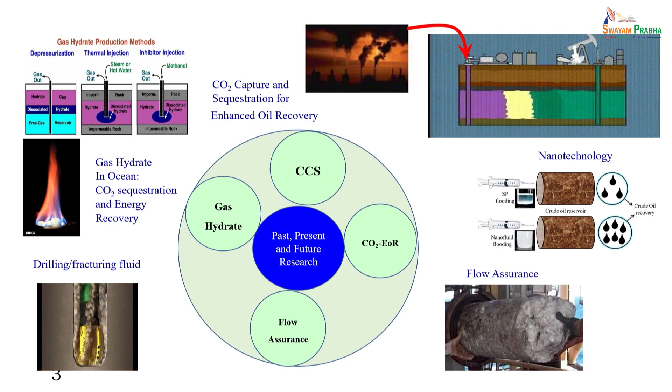Today's talk will primarily focus on properties of carbon dioxide, and mainly on the capture side, CO2 capture and transportation. As I said, there will be talks given by various other faculties which will cover utilization, catalysis partly, maybe conversion, maybe electrochemistry, etc. So we will have to figure it out, you have to connect the dots, right?

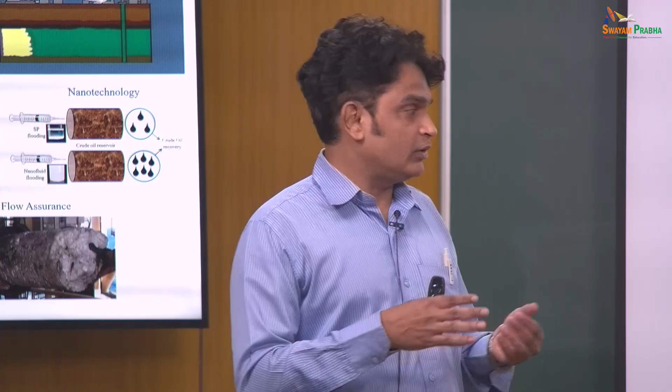She has already discussed these climate issues and how the temperature is increasing. We have been closely around 420 ppm or so, and we have been releasing about 36 gigatons of carbon dioxide into the atmosphere every year, and it is increasing day by day, right?

Why is it important? Even if you talk about 420 ppm, the question is whether it really matters as a worry. It's like out of 1 million balls, we have 420 balls. So do I really worry about it?

It is indeed important. There have been lab scale experiments showing that a small amount of CO2 can be responsible for increasing the temperature. If you make sure all the conditions mimic the atmosphere, then the temperature will rise. For example, if I sit in a car, close the door, and come back after a while, you can feel the car is hot, you cannot stay inside, right? This is a greenhouse gas effect, so we have to really worry about it.

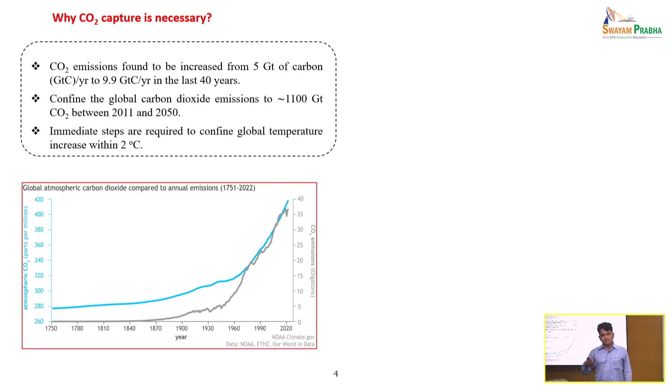If you look at the data over the past several years, there is a rise in temperature. It is of course because of CO2, and there are various other factors as well, but one major factor is carbon dioxide emission, right?

Now how can we go for net zero? Of course renewables is something we have to consider. But can we really go for renewables entirely? Can we take care of all our energy requirements from wind, solar, and so on? No, it's not possible, because today about 82% of our energy mix comes from fossil fuels all over the world. Looking at growing economies like India and China, we are primarily dependent upon fossil fuel, including coal, oil, and gas.

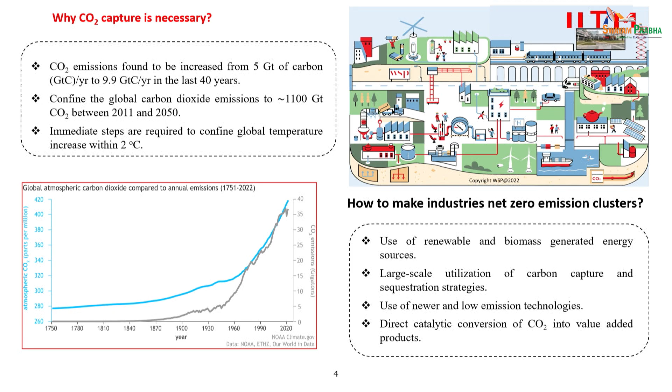If you go out of the campus, you will find several thousands of cars and automobiles running, including two-wheelers, and you will find that they all use oil, petrol. If there is a bandh or strike by petrol pumps, I think there will be a mess in the city, right? All prices will go up. So energy is very important for our living. If you do not get oil, there will be an energy crisis, and if there is an energy crisis, there will be a food crisis. So all this is connected, right?

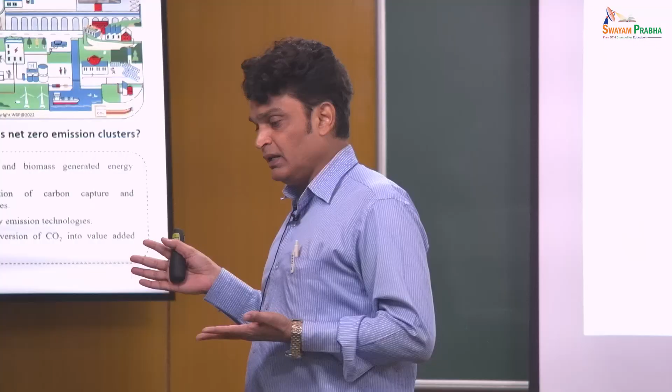Nowadays it's not that we only get locally made food available; we cannot survive on one thing. So energy is very important for our living, and our energy requirement is increasing day by day. I joined in 2010 at the IIT Madras campus, and I saw there were very few cars, even as an assistant professor when I joined, I did not have a car. I got one in 2021 or 2022.

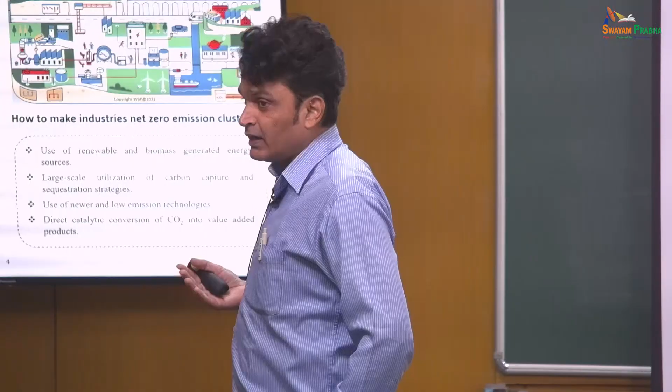I was happy riding my cycle. I live on campus, so why would I need a car? My children studied in Kendriya Vidyalaya and went on two-wheelers, so to be honest I did not have a car, not because I couldn't afford it. But today any assistant professor who joins the campus comes with not one but two cars, because both husband and wife are working. You can see the difference, right?

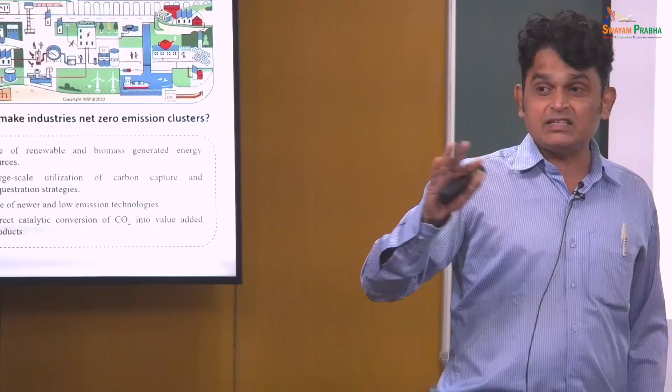All the classrooms are becoming air conditioned. That energy is not coming from somewhere magical, it's coming from electricity, and electricity ultimately comes from fossil fuel. So we have to understand our energy requirement is increasing. Everyone has a dishwasher and all kinds of electric equipment, and that requires energy. So energy is very important.

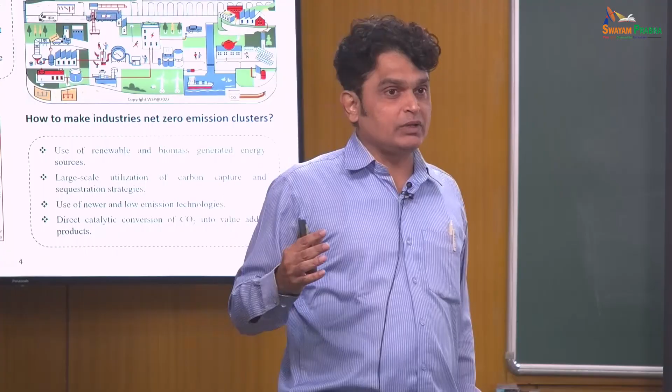In a short time, at least 3 to 4 decades, I do not see us going away from fossil fuels. It's not going to happen by magic that suddenly after 2 years we'll have everything coming from renewable energies. There have been studies which show that even for 50 to 60 years, fossil fuel will dominate the energy basket. The international energy agencies say that. Anyway, I am not going into detail about that.

So what is pollution, man-made pollution? We have solid land pollution, everybody is aware of this. We have liquid water that pollutes our rivers and everything, and we have air pollution. These are the 3 major forms of pollution.

Now what is the difference between them? If I go back, I can easily segregate solid material from the land. I have plastics, I can segregate that easily, even hand pick it. It's easy to separate from the land. Go to water, the liquid phase, molecules are different. It's slightly more challenging to separate dyes from the water. So I need a membrane, reverse osmosis, and all kinds of chemical processes that require additional energy.

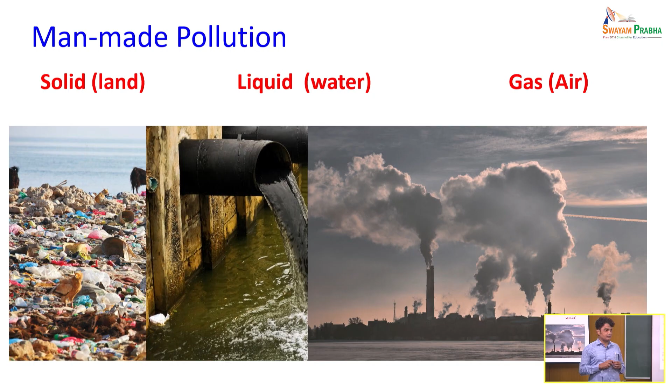Go to air pollution, very difficult. Once it is in the air, I cannot say that a CO2 molecule going from your nose can be captured and put in the dustbin. A molecule that goes into the air is difficult to capture. So either you segregate before you make the pollution, or you segregate after, which is easy for other things but not for air. You have to segregate it before you release it into the atmosphere. That is the more challenging aspect of air pollution.

Of course, air pollution involves particulate matter and other stuff that I am not going into detail about. But as far as CO2 is concerned, we have to ensure technologies are developed so that before it goes into the atmosphere, we capture it and dump it somewhere.

Now this CO2 emission is increasing, and as I said, the majority of energy consumption is responsible, like transportation, energy used in buildings, other industries, etc. And of course there's agriculture, forestry, and land use. So energy is a major section that results in CO2 pollution, carbon dioxide.

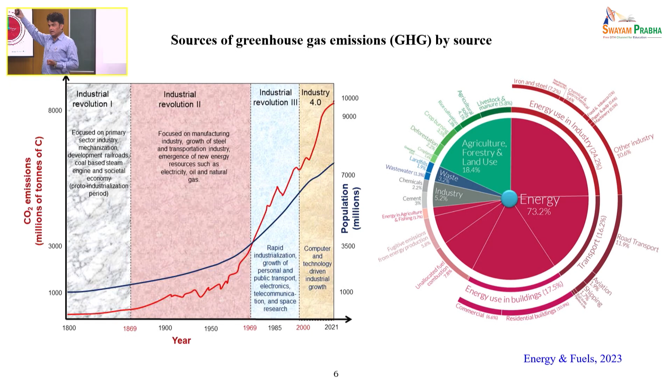Take any flyover you see, they are building flyovers everywhere. Ultimately that results in pollution, because you have to generate cement, steel, and everything. You have cranes running there. To generate cement you require a lot of energy and you release CO2. Even generating the steel required there contributes.

So every man-made activity ultimately has a CO2 footprint. Even the chair that you are sitting in is not net CO2-free, it has generated a certain amount of CO2 into the atmosphere.

So why am I telling you this? We are talking about today's $3 trillion economy. The Prime Minister says we have to go to $10 trillion, or $5 trillion, and so on. Every country wants that. Can that happen while saying I am not going to emit CO2 and still have a $10 trillion economy? It's not possible. There has been a correlation of CO2 emission with economics rather than population. The more you want your economy to grow higher, the more you become a consumer, you consume and throw. So sustainability is an important aspect of this whole game.

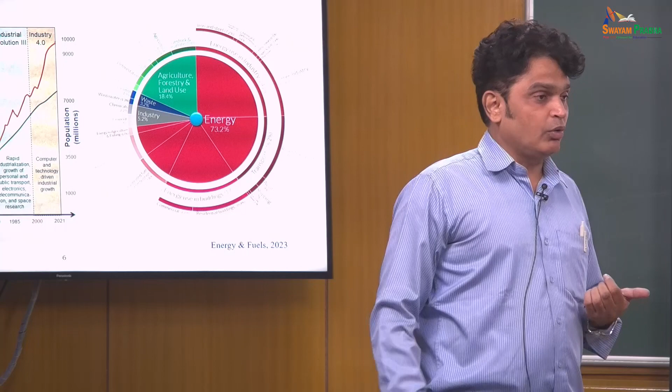Anyway, going forward, the global temperature is rising. I think Madam had already covered that.

Land to ocean temperature anomaly, somewhere around the 1970s, 80s, it is over. Beyond that, it is increasing.

Now there are various scenarios that show, if you capture carbon dioxide versus if you do not capture carbon dioxide, how the annual mean global temperature will rise in the next few years. There are certain models, Madam will cover those in detail, so I am not going to spend more time on that. But you have to understand that we have to predict the future 20, 30, 40 years down the line in energy, environment and earth.

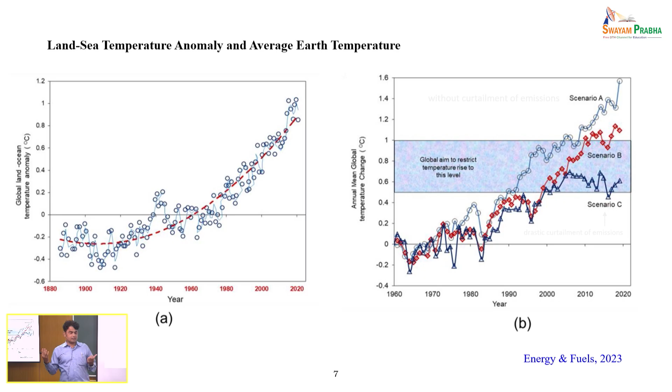So if you look at the name of my lab at IIT Madras, I have written 3E lab. It talks about earth, energy and environment. It is a nexus. I cannot say that I do not want energy but I want less CO2. The more energy you want, the more CO2 you are going to release into the atmosphere. So you have to dump that into the earth, or you have to take care of your environment. All these 3 E's are important when you look at overall climate change, and this nexus has to be understood.

Anyway, this is an example of coal. In the 1970s, 50s, 40s, you might have seen steam based transportation through trains. The British used to have trains. Then, because of pollution, they stopped that. They said, I am not going to run the train because it generates a lot of pollution, I should run it on electricity. Now most of the trains are actually running on electricity.

This data shows that somewhere from 1950 onwards, the use of coal in transportation has decreased. It's almost negligible now, in the 1990s and beyond. I do not see coal. Earlier, when I was a child, I could go into the market and buy coal. Coal was even used in households for cooking purposes, and kerosene was used in households too. But today if I go into the market, I will not get coal easily. I have to find out, somebody will say go here and there. Getting coal is not easy right now in the general market.

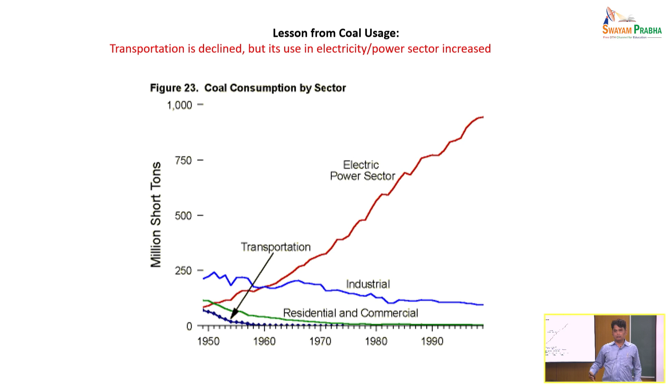But look at coal use in electricity generation, it has increased. So when we cannot see something, does it mean we are going away from coal? No. Today also, as Madam said, Germany wants to restart their coal fired power plants. I was reading a couple of weeks back that New Zealand also wants to import fossil fuels. So they have realized it's not a quick decision to say I am not going to use fossil fuels.

So even electric vehicles - I am a little critical about electric vehicles, not because they are not clean, of course they are clean, but they look clean. If you go back and look at the calculations, you will find they are more difficult for the environment, because they are not going to improve the electricity requirement. Where will the electricity come from? If we really want to generate all electricity from solar energy, then that's fine, but I am not seeing that happen anytime soon. Even to generate silicon solar cells, there are calculations in the literature which show that they also generate CO2. So nothing is CO2 free, net neutral.

Less than 1% of vehicles on the road are electric vehicles. There are about 15 million or so electric vehicles, less than 1% right now. But given the fact that I am happy with electric vehicles, does it mean that I am going away from fossil fuel? I require more energy, going forward. So CO2 in the atmosphere.

Nature has its own way to address the CO2 concern. It has said, okay, whatever CO2 is being emitted, I will capture that. So almost 50% of CO2, it has been said that nature takes care of it on its own, it absorbs it. But because we are growing our economy and burning more fossil fuels, the net CO2 going into the atmosphere is increasing gradually each year, and it is getting accumulated.

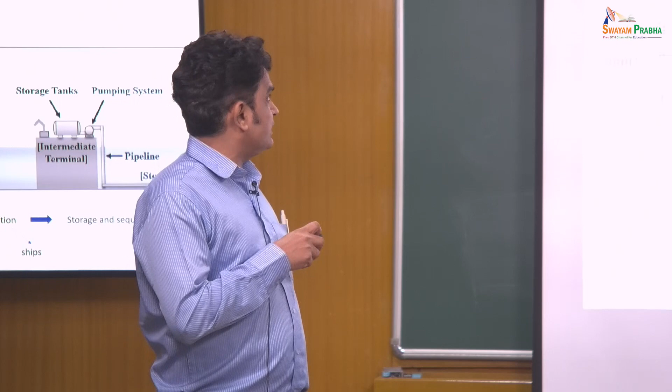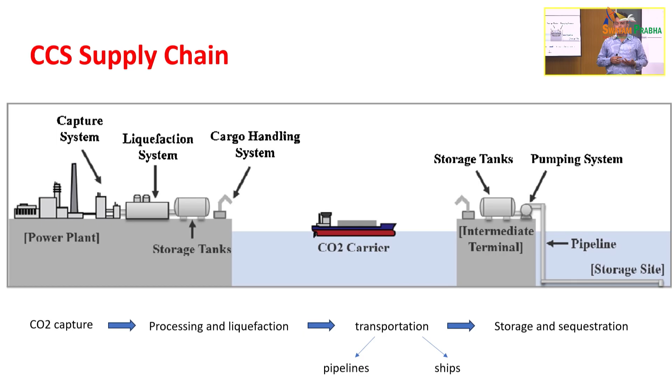Utilization means converting CO2 into value-added products like methanol, ethanol, or dimethyl ether. What kind of product can you convert CO2 into? Urea, carbonates, methanol—right? Most of these conversion processes still require energy. The raw material needed, for example for methanol, requires some kind of hydrogen molecule.

Where will the hydrogen come from? Today 99% of our hydrogen comes from fossil fuel, and less than 1% comes from the so-called green way—this is per the International Energy Agency report from 2021. So conversion and utilization are still a long way to go, unless I could get hydrogen from biomass or from splitting water through solar energy, which is again very tricky. There are technologies available, but these cannot yet be looked at for large scale—I cannot generate all hydrogen from solar power plants by splitting water. I can do that in the lab, but it's still a long way to go.

So what is a quick way to act? I am not criticizing any technology here, I am saying I do not have time, I want a quick decision. The quick decision is that I have to dump it somewhere—dump it in the sea or onshore. It's at least more favorable in the ocean or onshore, scientifically proven. Anyway, we will discuss that.

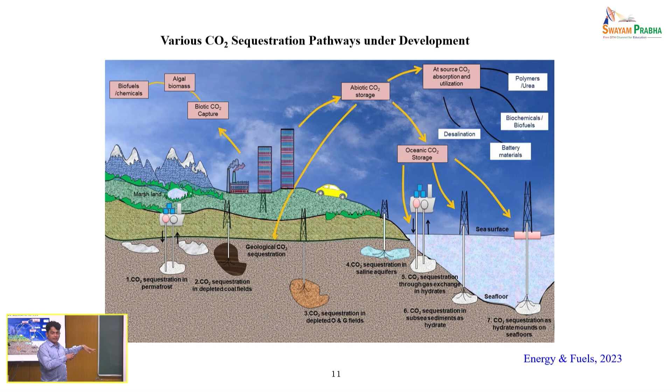The other potential region is the sea floor, where you can sequester CO2 in the form of solid hydrates or below the seabed—I will discuss that in one of the next classes, not the focus of today's discussion. Madam will partly cover aquifers, EOR, etc. We have worked on that, but Madam will be best to discuss all these details.

Anyway, this is ocean storage. In the ocean you can sequester in different aspects. You can do a CO2 plume sinking, disposal of CO2 in the form of carbonates since CO2 can convert into carbonates, and you can actually have CO2 liquid pools in offshore conditions, where CO2 will form liquid conditions.

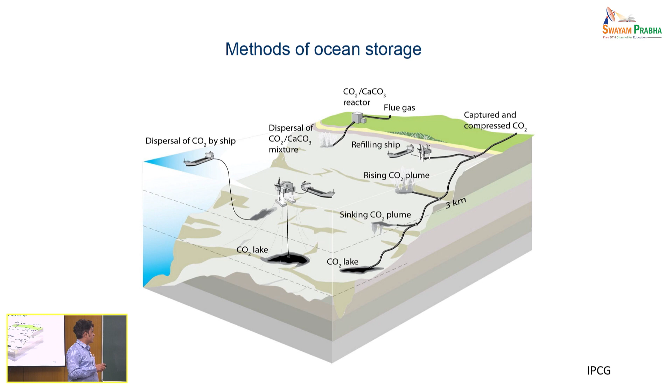I will discuss that in detail in the next class—how CO2 can form a liquid in the ocean and why it is safe. Anyway, this is the general CO2 storage mechanism: you have a flue gas, CO2 separated in a reactor, captured carbon dioxide compressed, and then transported through pipeline or ships or risers, etc.

Now there are various technologies available right now, from CO2 capture to sequestration. This is the TRL, technology readiness level, which starts from concept to commercialization. Most technologies are at TRL 9: post-combustion capture of CO2 from power plants, pre-combustion capture specifically from natural gas processing, transportation on onshore and offshore pipelines. CO2 is being transported—even though in India we are not doing it, but in certain countries like Norway and the US there are pipelines onshore and offshore transporting carbon dioxide. Then transportation by ships, CO2 sequestration in saline formations, and CO2 injection in depleted oil and gas fields or for enhanced oil recovery—these are all TRL 9.

There are certain technologies like ocean storage that have moved to proof of concept and now also to pilot scale, so it is now at TRL 6. Norway is doing that—this is somewhere in TRL 6. This is an old slide, 2018 data that I have taken.

Oxy-fuel combustion, pre-combustion low temperature separation, biomass-based carbon capture power plants—this is based on ionic liquids, and this is membrane-based CO2 separation. You can see there are a variety of different technologies beyond TRL 6, from pilot plant to commercial, and new technologies are also being looked at. For example, one of my students, Prerna, is working on metal organic frameworks for carbon dioxide capture—she will discuss that briefly in a separate discussion.

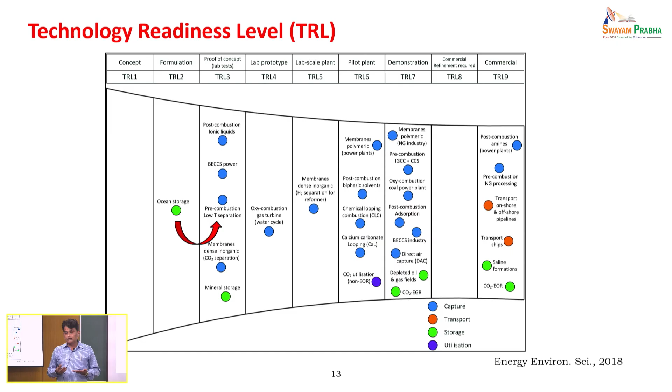Why this major focus on CO2 capture? Because anything you want to sequester from air or flue gas requires capturing carbon dioxide first. So there is one way to capture CO2 from flue gas, or another way to capture CO2 from air—as I said, at around 420 ppm, a very small amount, very difficult. I do not know where the CO2 is lying here in the room—it's a challenging task. That is called direct air capture, DAC.

People are also looking at direct air capture technologies. There are plants available commercially, but they are still not really being expanded in a major way. But slowly it is expanding because the government has to do that.

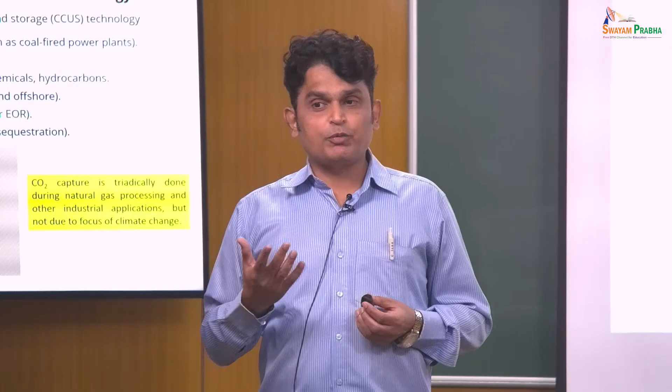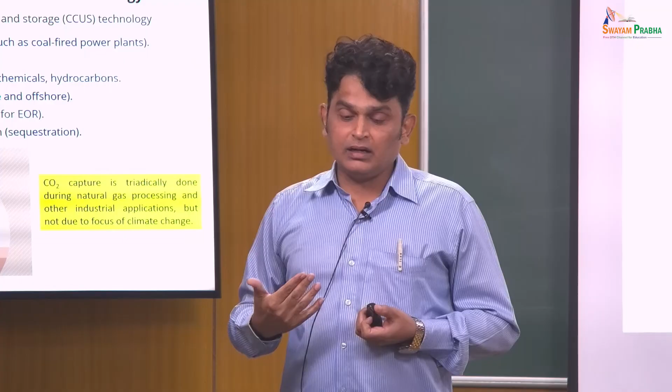Now, this is the junk that we produce. It's not something where you see that you are segregating your waste and not generating anything out of it—you still have to pay the corporation, a tax or charge for that. So we pay for segregation. Similarly, as human beings, in order to ensure we are in a safe environment, we have to pay for that—there will be a penalty in terms of money. Technologies are looking at how to reduce this cost of capture, transportation, and sequestration.

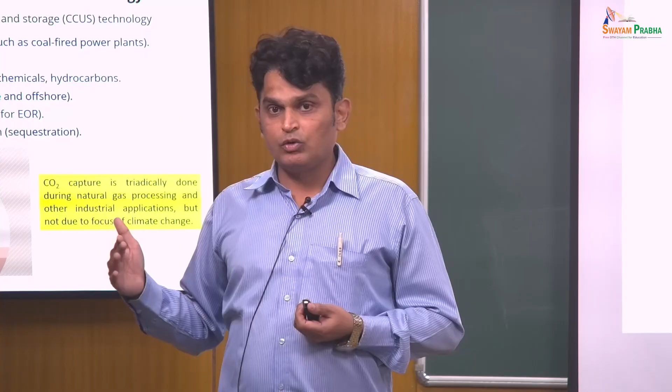So in last few years, that cost has also slightly come down, looking at development in technologies. So we'll discuss a little bit of that cost aspect.

Now CO2 capture, either looking at a stationary plant or point source like a coal fired power plant, or you can do that from direct air capture. You can convert that CO2 as a feedstock for petrochemicals and hydrocarbons. Again, challenging, as I said, it takes time. You have to transport that from the power source to the storage sites, either onshore or offshore, by pipelines, and you have to inject that into the underground for enhanced oil recovery or depleted oil and gas fields, etc., or you can do that in the ocean.

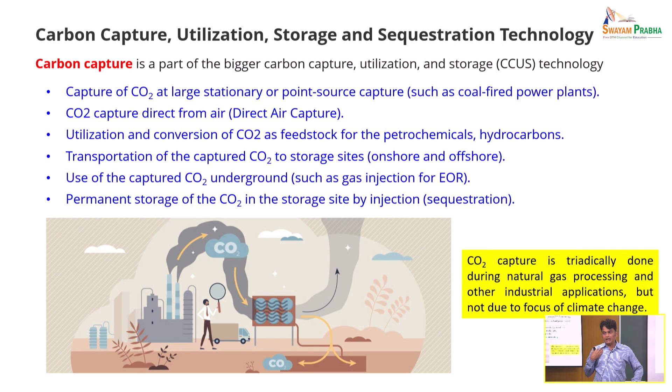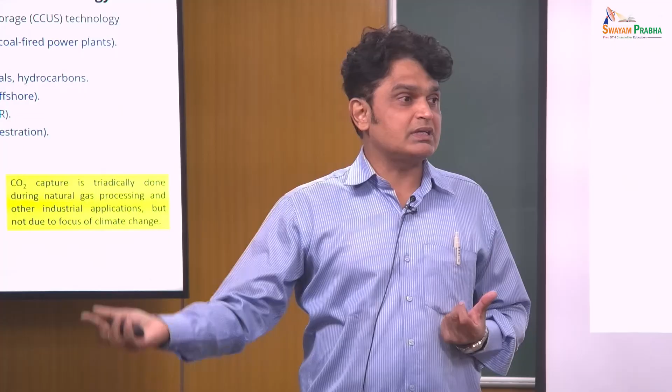CO2 capture is traditionally done in natural gas processing and other industrial applications. It's not that something started recently. The natural gas industry has been doing it since a long time, but they were not focused on climate issues. So the technologies were available for specific applications. Now similar technologies are being expanded, and of course new technologies are also coming up to take care of CO2 from flue gases, power plants, and other industrial activities where CO2 can be captured and stored.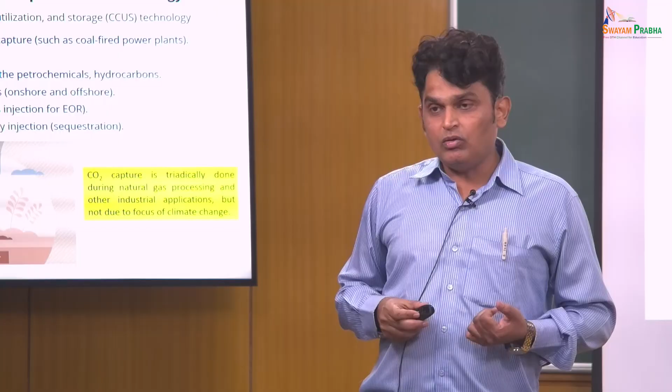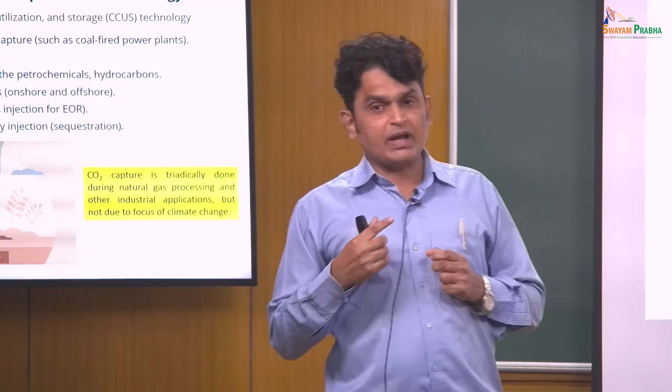Now this requires significant strategic decisions. Why? Because one has to understand that you require to develop CCS corridors where I can capture CO2, transfer that to the pipeline, sequester into the formations, or use this into industrial applications. So CCS corridors have to be developed by different countries so that this overall process can be made very efficient.

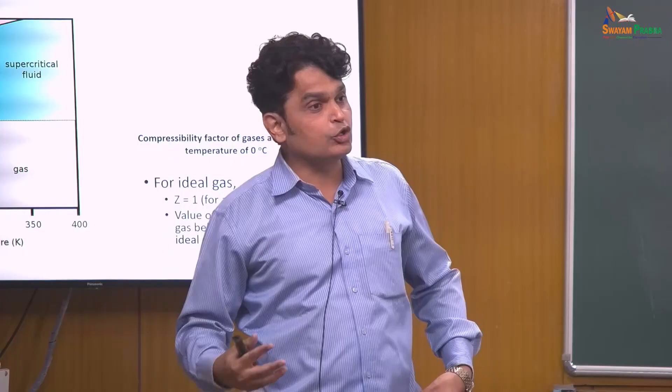Why is it important? Because we should talk about onshore underground storage. Most of the temperature in the reservoir falls in this zone, so CO2 once it goes into the reservoir underground onshore, it becomes supercritical. Supercritical CO2 has different properties, not the same as a gas, so you have to understand that aspect. Supercritical CO2 will have interaction with different reservoirs like sandstone, shale, etc., or basalt formation.

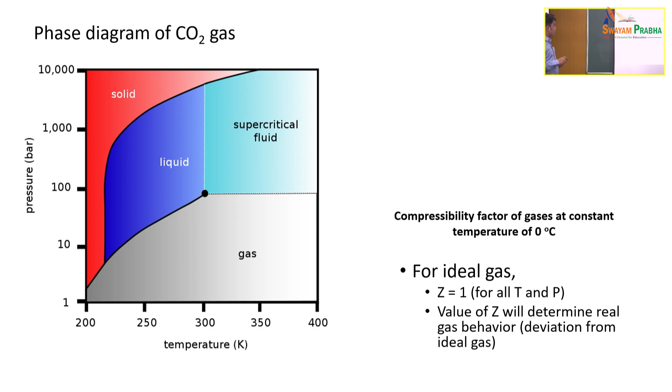If you look at CO2 in the ocean, if I want to inject that into the ocean, the CO2 at a certain depth will become a liquid. Ocean temperature is somewhere about this condition, close to 4 degrees centigrade, and the pressure beyond a certain point, 5 megapascal and beyond, it becomes liquid. So if I want to dump CO2 into the ocean, it becomes liquid at those conditions. We will discuss that in detail later on. But this is a very important figure which tells you the different properties of phases like gas, liquid, and supercritical fluid as far as CO2 is concerned.

Now everybody knows that any gas is ideal at normal temperature and pressure conditions, Z is equal to 1. But as far as CO2 in the atmosphere is concerned, I don't have to worry about it. But when I want to transfer that through a pipeline, either onshore or offshore, the pressure and temperature conditions will not be atmospheric, they will change, and therefore CO2 will not be an ideal gas, it will become a real gas.

Now how does it look like, this is a simple schematic, Z versus pressure, starting from 0 to 1000. Now you can see nitrogen, hydrogen, CO2 - the extreme lower line is for CO2, and the extreme second one is for methane. You can look at the Z for these four gases, they vary differently.

All gases actually have a Z of 1 at normal conditions of pressure and temperature, but as pressure increases, the value of Z differs for individual gases. For hydrogen, Z always becomes more than 1 as pressure increases beyond atmospheric condition. So Z always increases beyond 1, and therefore hydrogen storage is still a challenging task because of this property. The amount of volume required to store hydrogen increases as you increase the pressure, so it has not become economical as far as hydrogen storage is concerned. Hydrogen has a molecular weight of 2, a very small molecule.

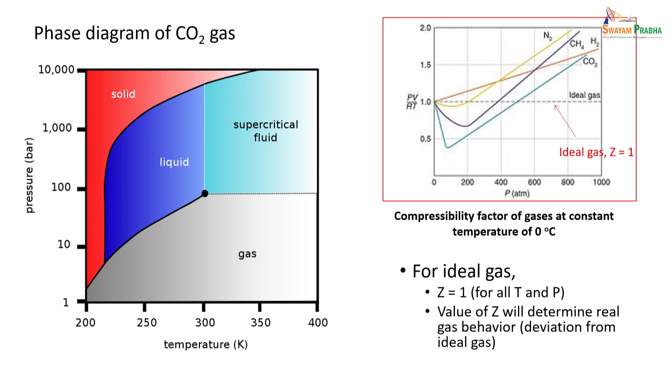LNG, you might have heard, liquefied natural gas, they transport it at about minus 170 degrees centigrade at atmospheric condition, because methane becomes liquid at that condition, right? Similarly, CO2 becomes liquid at minus 30 degrees centigrade at atmospheric condition, so they transport that. It has been found that CO2 transportation by ships is more reasonable at those conditions, right? So some of these properties of CO2 are very vital to understand.

18%. Now, one chimney, you can see how much it emits per hour. This is actual data from one power plant. One chimney emits how much? Can you tell me how much ton is that? 3000 ton, close to 3000 ton per hour. Everybody with me? Assuming this is about 20% carbon dioxide, easy for calculation, how much is that? 600 ton per hour multiplied by 24.

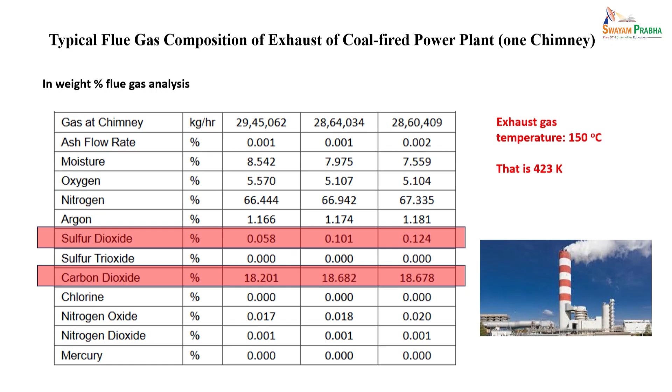So this is a situation. Now when I say the carbon dioxide property that I have discussed, carbon dioxide is not a single molecule available in the atmosphere or even in the flue gas. It is available along with different other components of gaseous state. So therefore the properties will change, properties like density, viscosity and so on and so forth.

So you require equation of state models. You must have studied that, equation of state models like Peng-Robinson, SRK, Redlich-Kwong and so on and so forth. So to use those equation of state models to understand the properties of flue gas, you want to transfer and design your operations to separate carbon dioxide from the flue gas. Everybody is with me, right?

Now, what are these important aspects of flue gas generation in the power plant? As I said, energy is important, so we cannot stop going away right now from the coal-fired power plant. So typically we have a power plant that has to be connected with CO2 capture systems, like is shown here schematically.

You can have a CO2 scrubber, SO2 scrubber, as I said, that you have to separate out. Ensure that you require different types of material because it is not easy to handle SO2, sulfur dioxide. You have a flue gas that goes into the absorber where you can have different systems like amine systems. You can separate CO2, capture that. You can have a stripper unit and then you can separate the pure CO2, and then the CO2 can go into sequestration or transportation. Are you getting my point? So this is a typical schematic of how the combustion and associated CO2 capture process looks like.

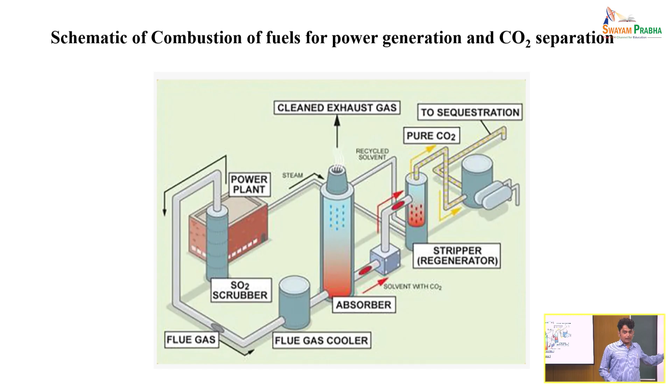Let me come to this, right? Now there are 3 major types of combustion. Either you can do a pre-combustion capture of CO2, or a post-combustion capture of CO2, right? You can capture carbon dioxide before you generate it into the atmosphere.

So you can have a pre-combustion process where a fuel can convert into a gaseous mixture of hydrogen and carbon dioxide. Partially you oxidize that, oxidizing coal in oxygen and air, and then you generate a synthetic gas, syngas. The synthetic gas can further be converted, rich in hydrogen and carbon dioxide. The advantage of that is that you are actually capturing carbon dioxide which has a reasonably higher concentration of CO2, so that it becomes easy to capture.

As I said, when you have less amount of CO2, it becomes very challenging to capture. When you have heavier or more amount of CO2, then you can have a better chance of capturing it. Then hydrogen can go into power generation, electricity generation, and then you can actually capture that CO2 and store it. Here the CO2 in the mixture can range from 15 to 20%.

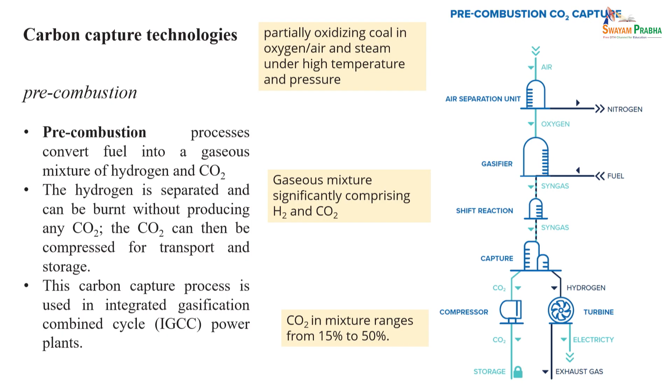This requires an integrated gasification combined cycle power plant. These are less available. People are reluctant to do that because this doesn't really add any value to them technically or economically, unless they get some money, they do that, or they don't. So this is a money game primarily. You know, what really makes it economical, that's the question.

Now the other method is post combustion capture. So these are limitations, as I said, which is why people don't do pre-combustion. It has high efficiency and relatively easier carbon removal from fossil fuel. The advantage is that the hydrogen-rich stream can convert into electricity efficiently. However, the overall capital cost of the gasification process exceeds the conventional pulverized coal fired power plant, and that's discouraging their adaptability more.

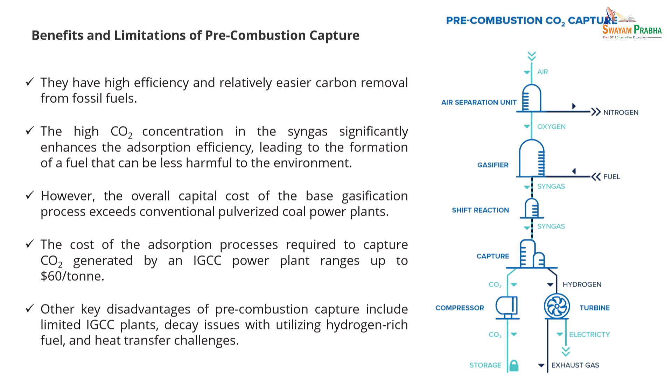The cost of the adsorption process required to capture CO2 generated by IGCC power plants can range up to $60 per ton, which is still not very attractive to companies. The other disadvantages of pre-combustion capture include limited IGCC plants, decay issues with utilizing hydrogen rich fuel, and heat transfer challenges. Again, hydrogen handling is a very challenging task, with safety issues and so on. So this is still at a stage where more research has to be done.

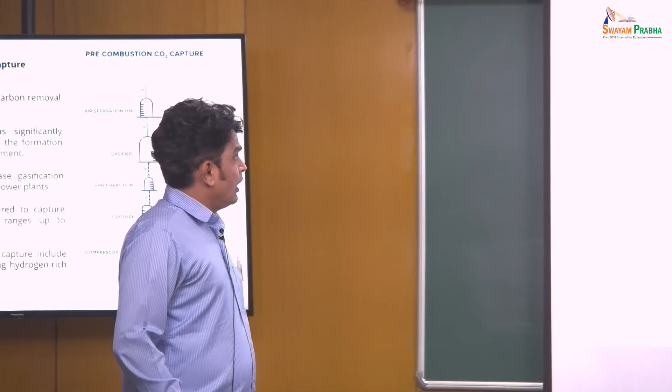Then we have post-combustion capture, which is right now something people are looking at attractively because you combust it and then capture CO2. Technologies are readily available since you can use conventional technologies to capture carbon dioxide. The challenge is that the CO2 concentration in the stream is very low, sometimes less than 20%, 7 to 14%, and as low as 4% in a gas power plant. So it's very challenging to compress that, but it's reasonably easier compared to pre-combustion capture.

This is what a post-combustion capture schematic looks like. You generate and burn fuel, you have exhaust gas that goes into it, you get electricity, and then you capture carbon dioxide and store it or transport it for subsequent processing.

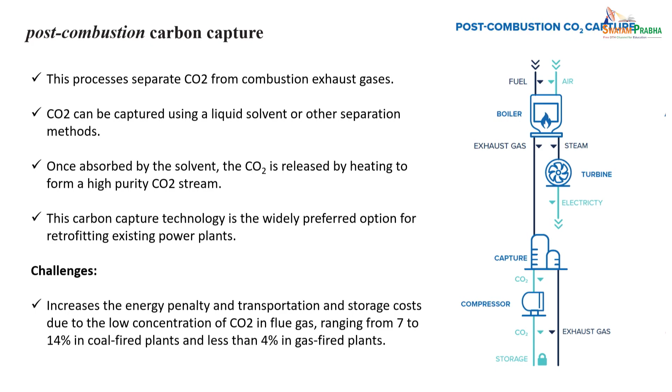Something very attractive is oxy-fuel combustion capture. This is a more promising technology that people are looking at. Oxy-fuel combustion uses a pure oxygen stream instead of air to burn the fuel, so that you generate more CO2 which is rich in concentration.

It becomes easy to separate or capture that CO2, or it's possible you may not necessarily need to capture it, because even with 50-70% or more CO2, you can use that directly for underground storage. I can transfer that directly to the storage site. So I can address the capture part cost-wise by using a pure oxygen stream to burn the fuel.

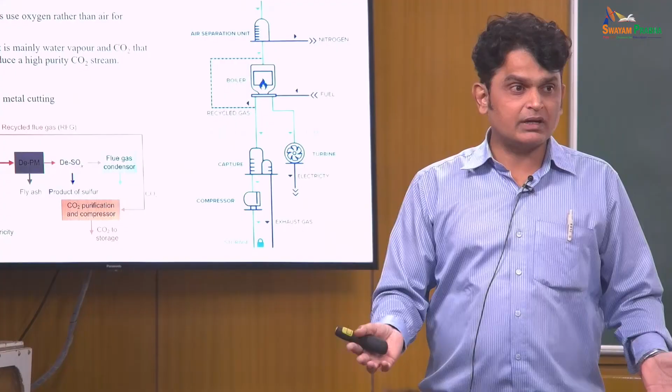This schematic shows an air separation unit where you generate more oxygen. Similar to how COVID oxygen concentrators separate oxygen from air, you separate oxygen from air and use purer oxygen in the boiler. Because you have mainly oxygen, complete combustion is expected, so more CO2 goes into the exhaust gas, making it easier to capture. You then transport that to the storage site, and of course you get electricity out of it.

You can also have sulfur come out, which you can capture, so it's reasonably easy to capture CO2 from this stream. This has been used primarily in steel making and metal cutting industries, but recently it's shown an advantage of having a high flame temperature since you're using better quality oxygen, so the efficiency of the power plant may also increase. There may also be challenges with heat losses because of the higher flame temperature, so that has to be curtailed.

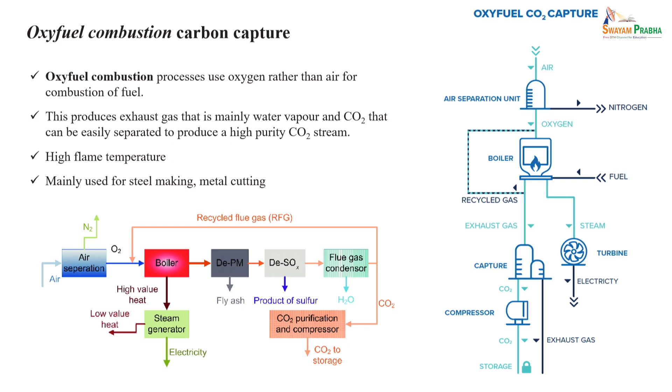That's oxy-fuel carbon capture, which is still challenging. So we have to look at the cost-benefit, as all decisions depend on the cost factor. As a technologist or scientist, I feel this is a very attractive proposition. The cost has to come down through better technology for separating oxygen from the air. This is ultimately a cost game - anything we put into a plant, cost will play a role.

So this is the overall scenario: we have post-combustion, pre-combustion, and oxy-fuel capture, plus certain industrial processes where you generate oxygen with a separation unit, a CO2 separation unit, and then compress and dehydrate it. This is the capture part of it. As chemical engineers, we have absorption, adsorption, etc. - all these concepts go into separating CO2 from flue gases.

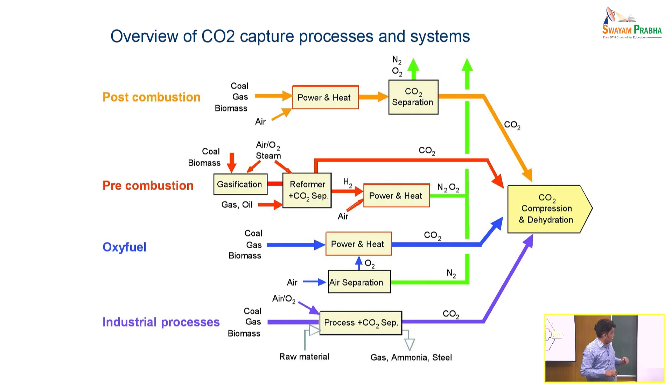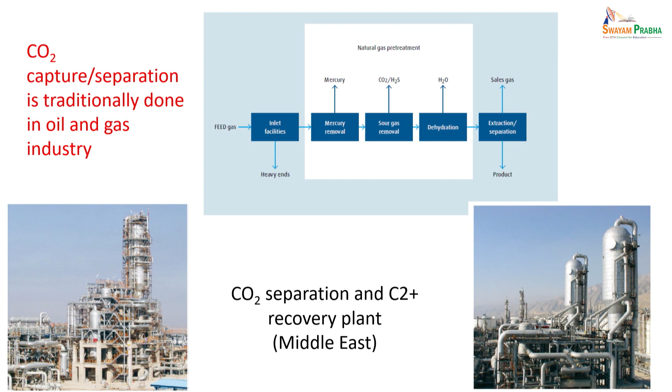You can also have a dehydration unit where you separate out water, and then you have a product gas, and you can actually have CO2 and H2S that might go into the atmosphere. They may not really worry about it, because that is not enough CO2 to be transported, so they may release it into the atmosphere, or they may sequester it into the subsurface reservoir. So these are practices being used in the industry.

The major solvent-based system - in the next couple of weeks you will hear about different technologies, people may talk about adsorption, etc. I'll just briefly tell you that amines are still being utilized widely as a solvent system because they have better efficiency to capture carbon dioxide, which can go up to beyond 80% in certain cases.

Your set of amines - you can have monoethanolamine, diethanolamine, methyl diethanolamine (MDEA) - and they have a concentration of lean solutions, and this is a typical guideline for when each can be used. So depending upon the case, their selection decides which gives a better solution.

Conventional equations tell us that you can convert and capture CO2 in amine carbamates. You can also capture H2S gas from, say, natural gas systems. You can have amine sulfides, and then you have a typical schematic where you have an amine absorber and a stripper.

Absorption takes place at relatively 40 degrees centigrade. You strip it at about 100 or more than 100 degrees centigrade, so you separate the carbon dioxide from this stripper and then take it away.

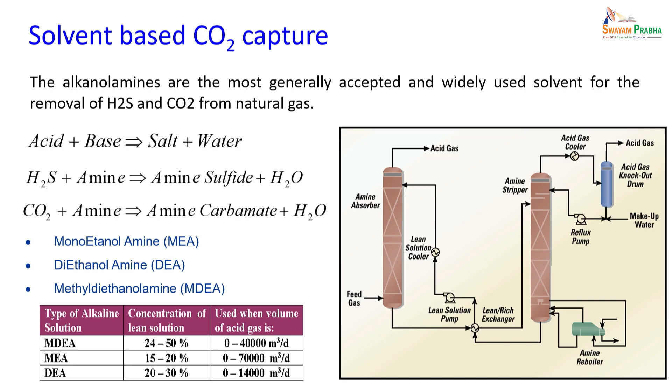Design aspects can be looked at - how much size of absorption and desorption columns are required based on the amount of flue gas that you can handle. Simple chemical engineering principles go in: equilibrium constant and equilibrium ratios, and the number of plates or packing height required. So all those simple calculations are possible here.

Now there are power plants available, there are CO2 capture plants available. It's not that this started recently, but very little effort was done before. In 2009, in Alabama, a power company plant in Barry - one of the largest at the time, based on a coal-fired power plant - here CO2 was captured using amine solvent technology.

This was transported to a geological storage site. About 114 kiloton of CO2 was captured, transported, stored, and monitored through the pilot project. This was done, and there were efforts made 15 years before that. Now it has been accelerated.

This is Norway's Sleipner project, very famous, and Japan's Tomakomai project. Norway has been looking at CO2 capture into offshore subsea sediments or saline formations for more than 25 years. The Sleipner project separates CO2 from natural gas produced at an offshore platform, and CO2 is then injected and stored into the adjacent offshore formation beneath the sea floor.

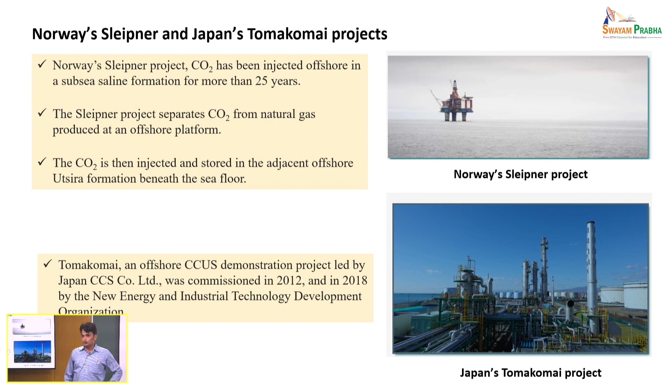And in Japan, this is a demonstrated project by the Japan Carbon Capture Sequestration Company, which was commissioned and recommissioned in 2012 and 2018, and they have shown that CO2 can be captured and transported for subsurface geological operations. So there have been efforts made. I will also show you in one of the next classes additional efforts made at the pilot scale.

Now we are not behind, but we are doing a small step, being an academic institute. As I said, Sembcorp came to us and said, okay, we have this chimney and we want to capture the CO2, carbon dioxide. So this is some effort that we have done for a power plant, and we then started looking into it.

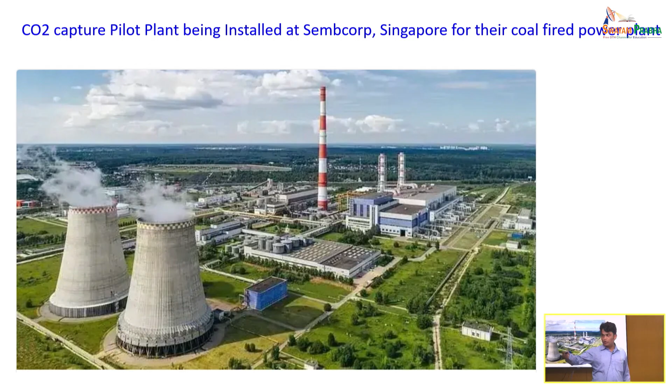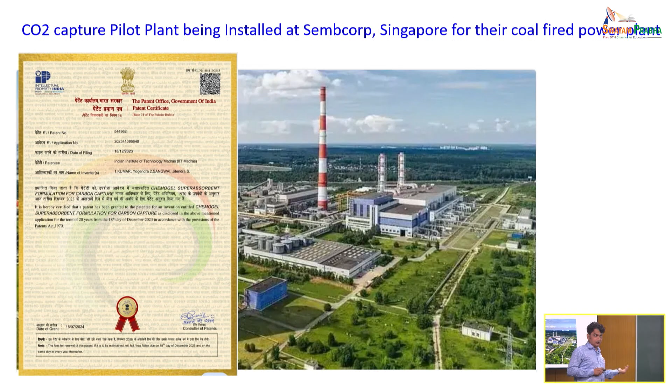Yogendra, sitting next to me, is my PhD scholar. He worked on the amine solvent and improved its efficiency by a certain magnitude. We then filed a patent and got it approved very recently, within 6 months - this is an Indian patent - and now a pilot plant is ready for installation.

So this pilot plant has been delivered in the field at the power plant in Sembcorp, about 4 hours' journey from here. This pilot plant has been developed based on this patent, and we are trying to do studies there so we can see if CO2 can be captured efficiently using the system. We selected amines because it's a very proven technology, it's already there, so I can improve that technology further by one magnitude step and then use it for my application.

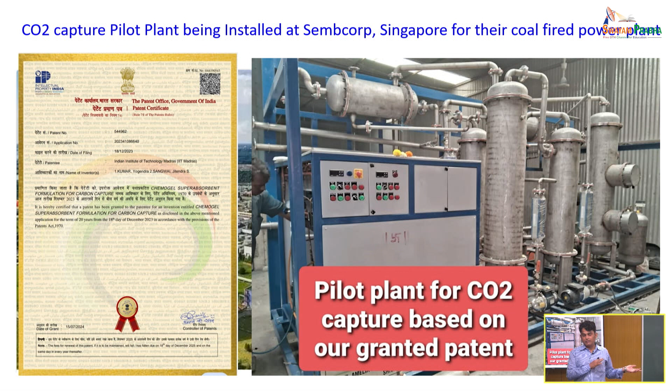This is being done, and we will hopefully have results in one or two months. Once we are done with this, we just have to multiply that. I do not have to reinvent the wheel, I already invented the wheel, I just have to re-multiply it. So we are waiting for the outcome.

Now transportation is a very important factor here. It's not something I capture and forget about. I have to store it in a storage tank, then liquefy it, and transport it by tankers. I can also transport it by ships and pipelines to the storage site or to the industrial application.

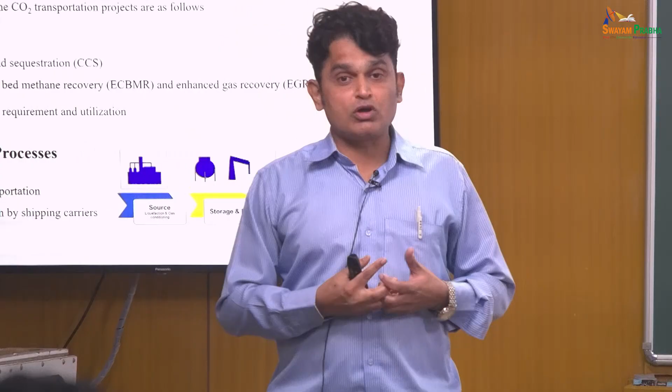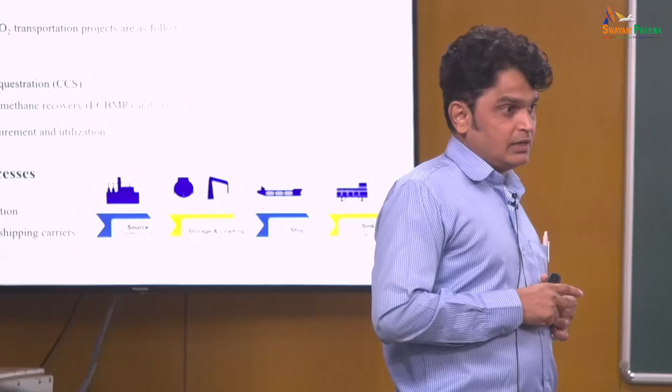CO2 is not an easy molecule to handle. Even though it is not flammable, it is highly corrosive to the environment. Any metal system exposed to carbon dioxide rich in concentration will corrode over time. With less concentration, I don't have to worry, but handling pure carbon dioxide is not an easy task. It's a highly corrosive system, and even the oil and gas industry is putting a lot of money into developing materials that can address this.

Handling of carbon dioxide at certain temperatures is challenging because CO2 becomes more corrosive at higher temperature and pressure conditions. So this is again a very challenging task.

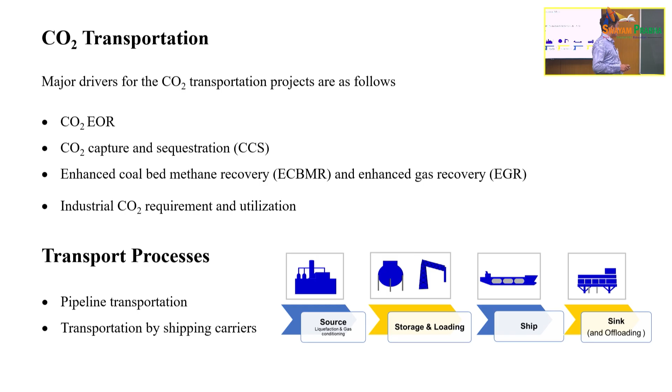If you look at this transport process, it is required because you have to transfer the CO2 to the sequestration site for enhanced oil recovery, coal bed methane recovery, or offshore, onshore, or industrial requirements. This total schematic shows that you have to store and load, then ship and then sink. Pipeline transportation or transportation by shipping carriers are things we have to worry about.

So there are various methods. I can send it into the ocean, to a deep sea CO2 storage site, or do this via injection platforms. I can use existing oil and gas platforms offshore or onshore to do the sequestration, so I don't really have to worry too much about additional capital investment.

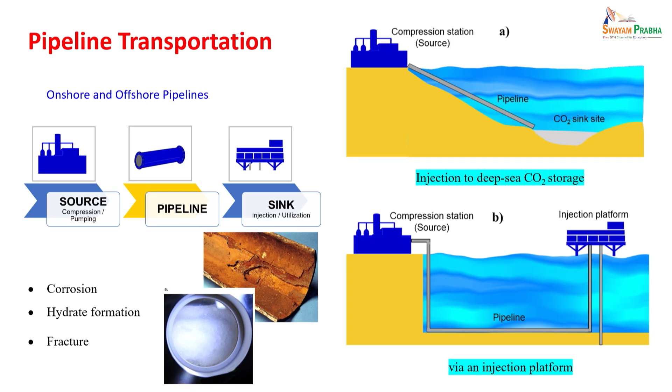Of course, in certain cases I may require that, but I can use existing infrastructure. However, you have to worry about aspects like corrosion, hydrate formation, and fracture that may result in metals. If I want to transfer CO2 at low temperature and high pressure, metal may not be able to sustain those conditions.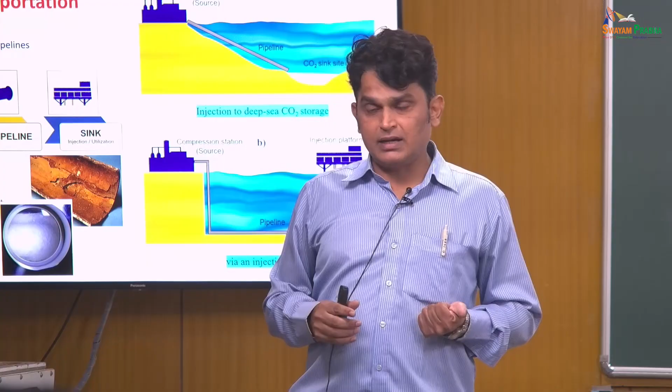So you can see this kind of corrosion - these are types of corrosion that can happen due to CO2 and other acid gases. Everybody knows that CO2, when it comes with water, can form acids. Yes, for pure CO2, but getting pure CO2 is very challenging. As I said, 100% pure CO2 is hard to achieve.

So even small moisture that gets in during dehydration and storing matters. As far as pure CO2 is concerned, you don't have to worry about it, but if it is not completely pure, it may cause certain amount of corrosion in the systems.

But are you able to generate pure CO2? What is the percentage? Agreed, but in case you do not have that much pure CO2 in the process - yes, of course, agreed. My objective here is to tell you why pure CO2 is very necessary.

If you do not have pure CO2, if you have water vapor - yes, agreed. But that's what I'm telling you: when you have pure CO2 available, here pure means without water vapor or any additional gas stream that may be hazardous to the metal, then you don't have to worry about it.

But if you have moisture along with it, and you do not take care of it, certain kinds of contamination can happen during transportation - for example a pipeline leak, or valves available, etc. It's possible that something may leak in. If you do not have a leak-proof system, there's another challenge: if your temperatures are lower, you may have different types of issues.

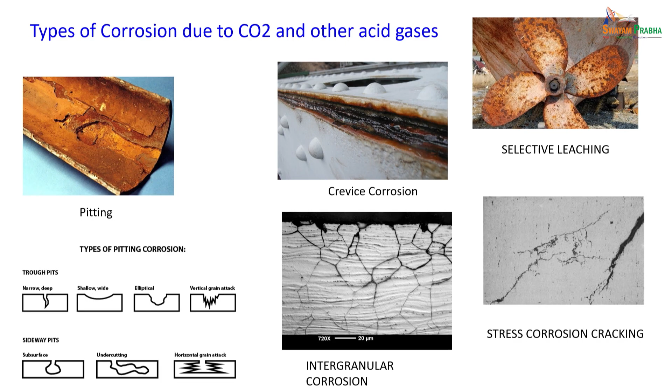CO2 carriers typically have a capacity of about 1000 cubic meters, and they can transport CO2 at about minus 30 degrees centigrade and about 15 to 20 bar pressure. At low temperature, when you go beyond that, you get brittleness that may affect metal strength over a period of time. Ship tankers can be categorized as pressurized, semi-pressurized, and fully refrigerated, depending upon the temperature and pressure conditions.

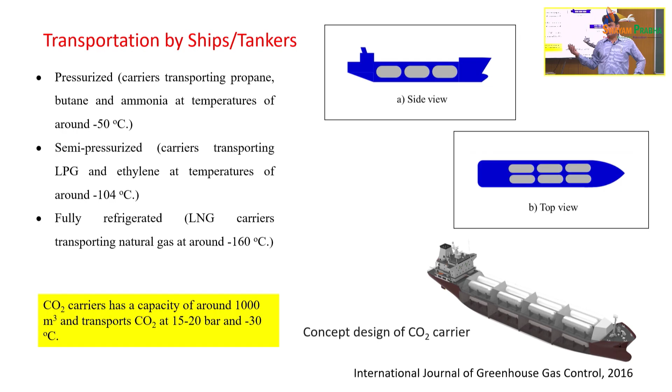This is a schematic design of how CO2 tankers may look. You have a top view and a side view, and these are well contained in ships. Like LNG tankers, a similar kind of technology can be adopted to generate such capacities, and we have to see how CO2 can be transported and stored by pipelines and through ships, etc. A whole lot of things are required to understand this schematic.

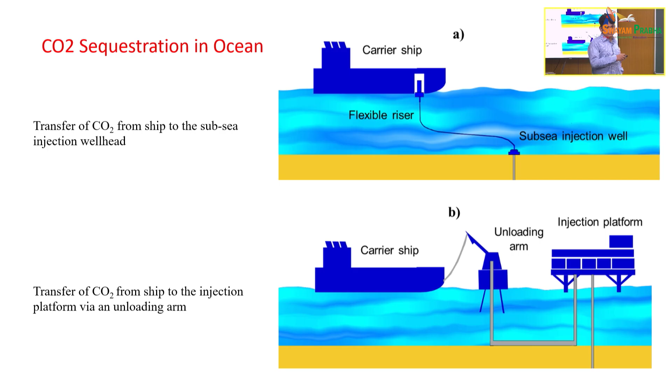Once you do that, you can inject it into the subsea sediments through a subsea injection well. You can have risers, which the oil and gas industry uses, so you can exploit that for this injection, or you can do it using an unloading arm and existing injection platforms. It's shown schematically here. So all these possibilities are there.

Now cost plays an important role. This data is from IPCC, I've just taken it for reference. This is a cost breakup for ships and the overall process of liquefaction. You can see that the ship accounts for about 30% of cost, liquefaction accounts for about 42% of cost, unloading is 16%, storage is 9%, and loading is about the remainder. I do not know exactly how they arrived at these numbers.

You can also look at the cost in US dollars per ton of CO2 for a 250 kilometer range, and it shows that onshore provides lower cost because it is easier to transfer. But as you increase the mass flow rate of CO2 per year, offshore transportation also becomes attractive—not cheaper than onshore, but it shows you need a more significant transport of CO2. You shouldn't plan an offshore project if you just want to transport 5 million tons of CO2 per year; you should plan it for significant CO2 transportation capacities.

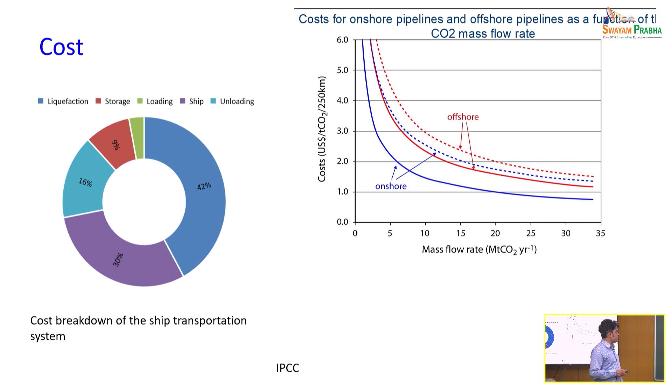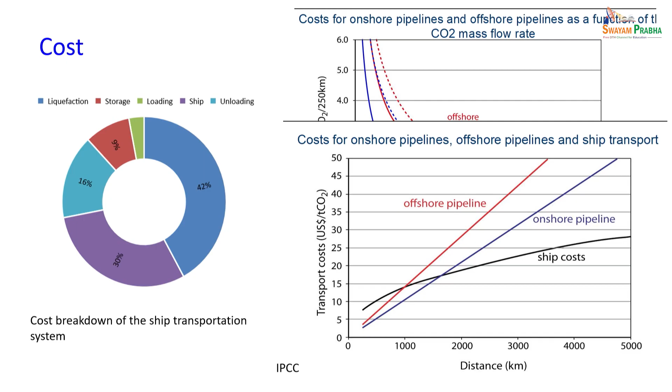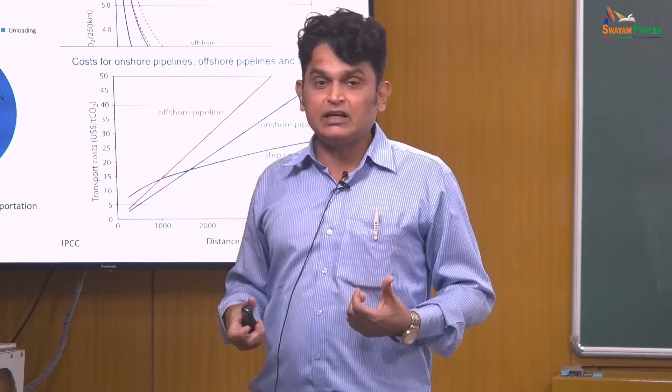This shows how the ship cost, transportation cost in US dollars per ton of CO2, varies over distance. For less than 1000 kilometers, the ship shows a higher cost, and offshore pipeline cost continues to increase dramatically. Onshore pipeline cost also increases as distance increases, but ship cost reasonably comes down below both onshore and offshore pipeline conditions. So transportation of CO2 by ships for longer distances may be an attractive proposition. As I said, this process requires a penalty in terms of cost, and we have to see what is best to make sure we do this conveniently.

Other aspects, which I think madam will certainly discuss in detail, is that CO2 injection onshore can also be done to recover more oil from the reservoir. So thereby you can actually generate oil and also sequester CO2. There are different phenomena that govern CO2 sequestration. Mineralization takes a long time, but you have capture by the pore network of CO2 on a short time scale, and over a period of time it gets mineralized. So there is a lifespan of CO2.

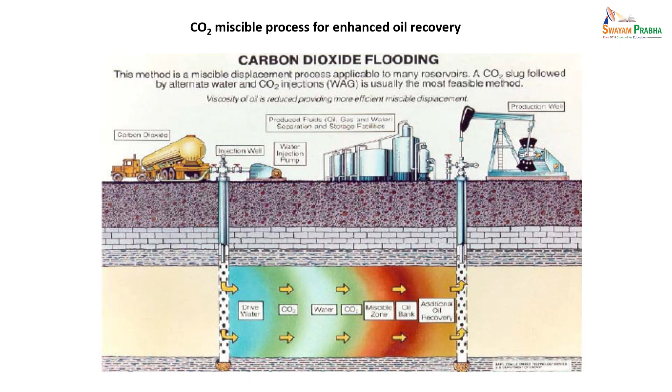What happens to the CO2? What is the fate of the CO2 that goes into the geological formation? There are certain studies available which indicate that CO2 storage for a long-term time span can be more stable in both onshore and offshore conditions. This gives some idea about CO2 capture, and we will discuss more details about that. I think we should stop here for today.